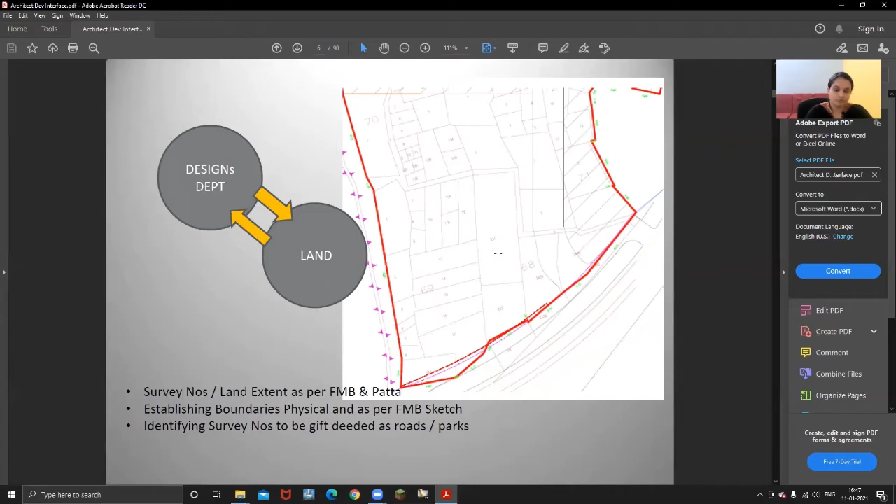In the concept and design stage, we get inputs from the sales and marketing team on what could be, whether they would be doing a marketing feasibility and sales feasibility, and they would give input like we prefer apartments or we prefer villas. Then what is the FSI achievable, for villas whether we need to go for twin or row, and what module they are expecting, so that has a saleable pricing which has to be determined.

And for apartments, whether we are going for low rise or mid rise, so which will give us the maximum FSI. Plotted development and preferred sizes of each plot, all that in the concept and design stage has to be worked out by a resident architect.

So the concept and design brief is circulated to the internal departments as well as to external architects as a design brief if we are finalizing the external architect. The resident architect is also instrumental in initiating and fixing external consultants like structural consultants and MEP consultants. We need to review the architect's agreement given by the external architects, to check whether the scope of services is fully holistic, and we need to conduct regular design sessions.

We need to consolidate the design brief, and we need to validate the design in terms of unit sizes and vastu, which is required by the sales and marketing department.

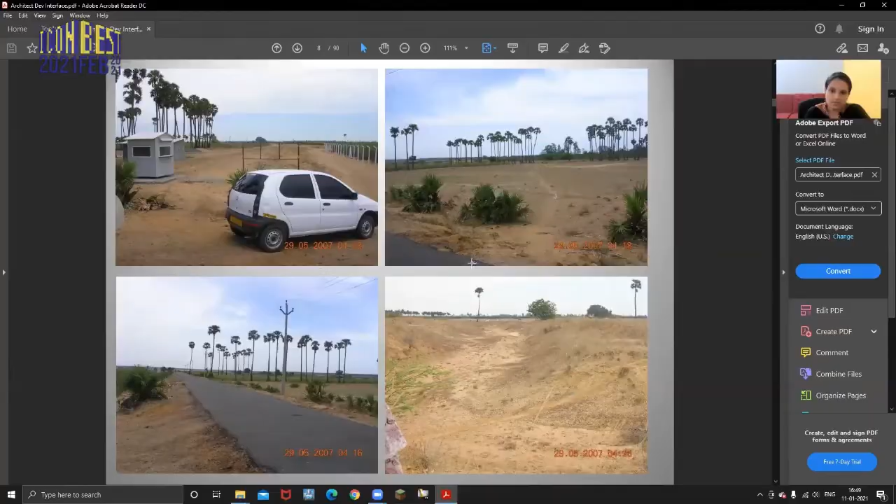This site, in 2007, was almost 400 acres of land bank, and we were in-house architects, a team of around 8 members, asked to work on different design typologies. We suggested an IT park, then residential, a spiritual center, a convention center. All these modules were worked out in various locations across the 400 acres, including multi-family housing and a medical college.

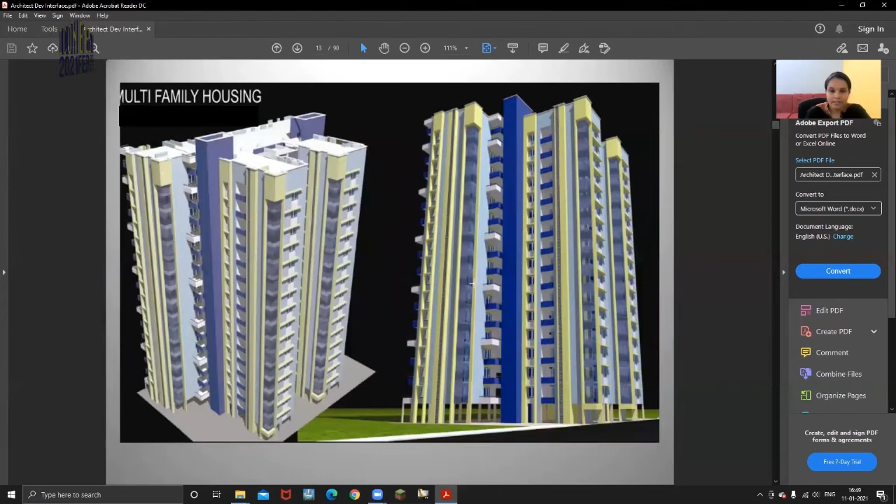So all these were worked out, and finally we ended up developing 110 acres over a span of 10 years. The main crux behind this 400-acre land bank was the finalization of the master plan, and after the master plan is zoned, allocating the land, with finance and marketing teams bringing people to develop their industries or colleges in this location.

However, being a private developer, dreaming of and bringing development into a place where there is none is a very challenging task for a developer company. It needs a lot of patience and hard work to bring in infrastructure, especially roads, street lighting, transformers, and leveling the land so there is no water logging.

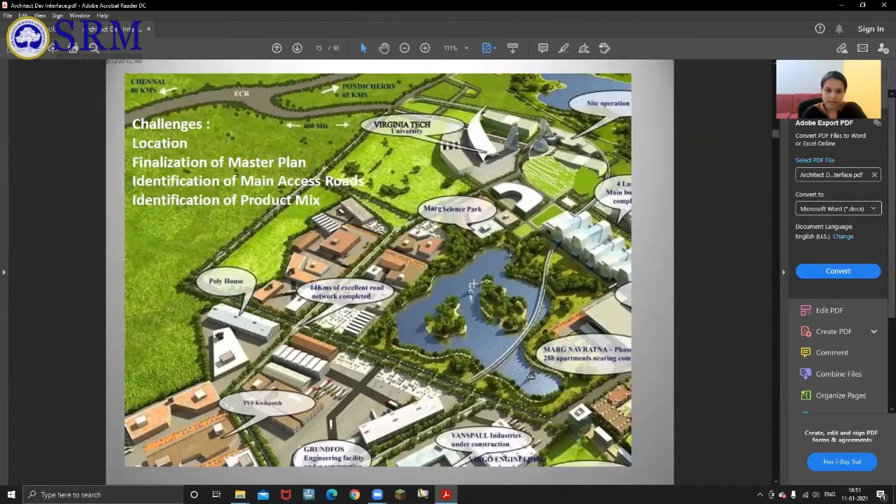So the main important point in a big land bank is finalization of the master plan. Previously the land bank was like this, and then it was developed into various zones as industries, college zones, and residential.

The next developer company I was associated with is ETA Star Property Developers, and they had floated a project of 22 acres at Tandalam near Poonamallee. It is a villa project.

The very moment we say villa project, 197 plots were purchased by ETA and Bashyam Group, and they floated villas in phase 1, which is 11 acres. So as resident architects, we did not have much design scope in terms of master plan, but we had design scope in terms of modules as plots.

We had one-ground plots, half-ground plots, and we were asked to work on it. And this being a budget project, it was not outsourced to external architects.

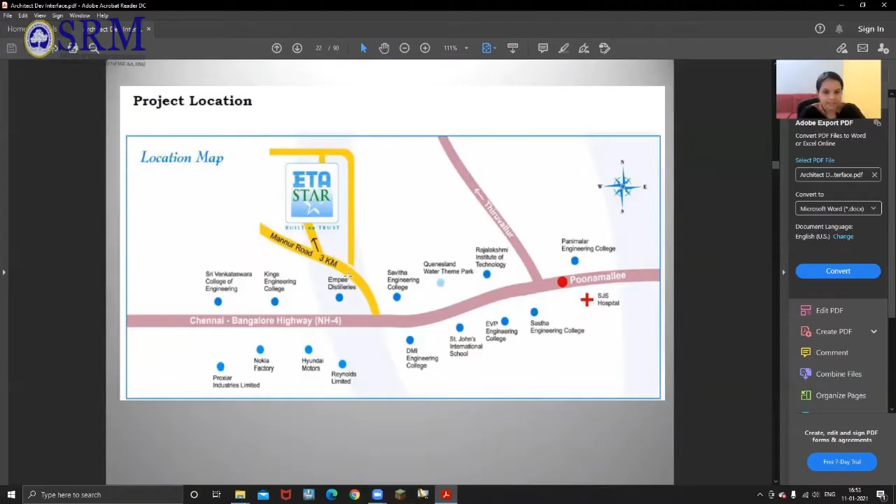You could see that the location is off the Chennai-Bangalore highway after Poonamallee, a little bit inset. So the location was slightly tough, and what the management ETA and Bashyam purchased was 22 acres of plotted layout. This was the access road off the highway, and for around a 1.3 kilometer stretch we had to get a PWD approval for laying the road to access the site.

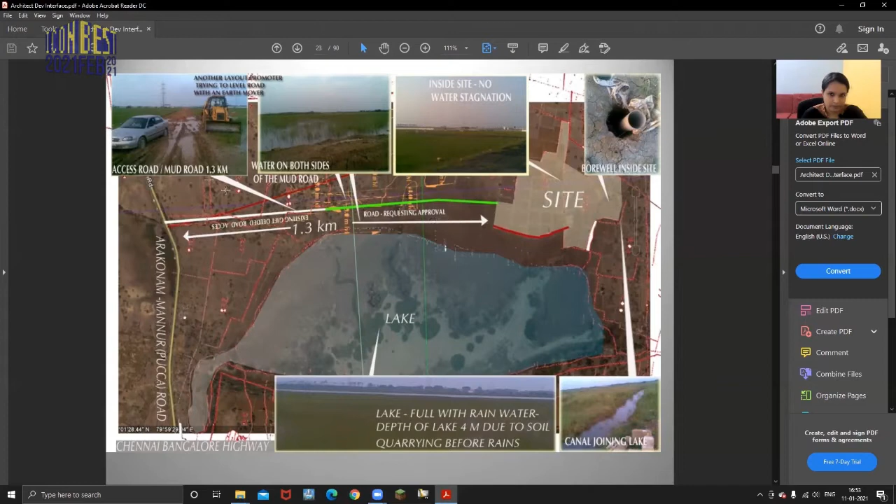And this was the site condition when the project land was initially identified for development. As far as ETA is concerned, they are a well-established company with their presence in the Middle East. Bashyam Group has also been in the industry for the past 30 to 35 years.

In this project initiative, we had many challenges. One is the location, and one is that it's already a plotted layout in which we had to develop villas. So accordingly, the project and product design had to be made.

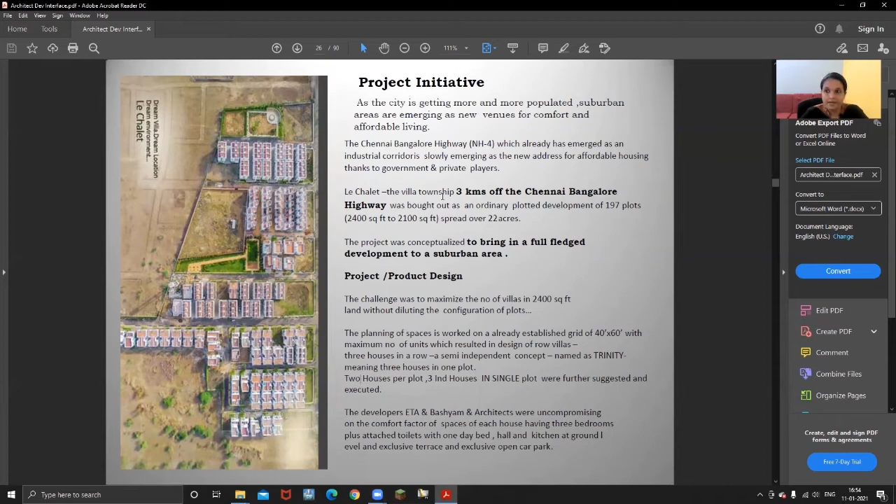The marketing and sales team had a budget where they wanted to price a villa at the cost of an apartment, meaning they wanted a 1,000 square foot, 3-bedroom villa. So that's how we slowly derived the product mix for this development.

In Phase 1, 1,90,000 square feet was developed, comprising 180 houses. This is a satellite image of the layout.

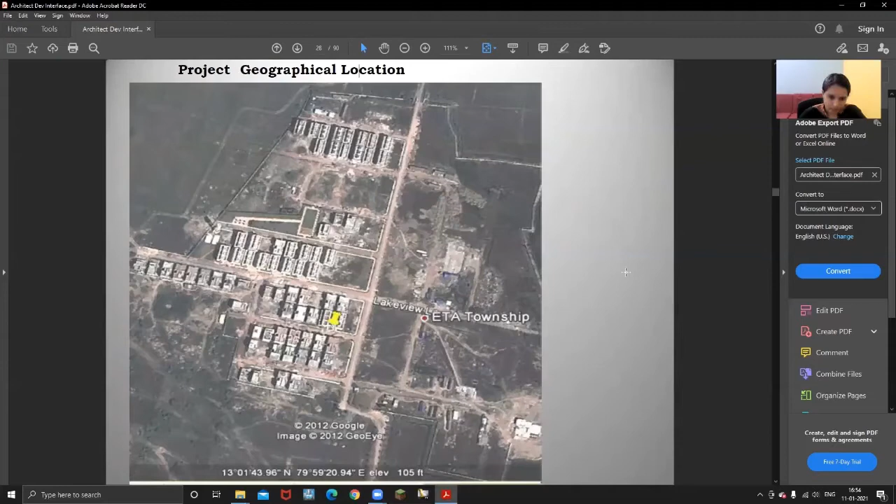The architects were from the ETA Designs Department, headed by Mr. Prakash and myself. The infrastructure consultants were Mahindra Consulting Services, the landscape consultants were Flora, and construction was taken up by a company called NA Divine Habitat Private Limited, with structural engineering by SBS Associates.

As in-house architects, we were involved in developing one ground plot. We had to have 2 houses as twin houses, then 3 houses as row houses, and we designed it so there would be a lot of openness in the project.

This is the design of one product mix, the row house, on a 40 by 60 plot. We had to fit three villas, leaving 11 feet of open space on one side, and similarly 11 feet of open space on the adjacent side of the opposite plot.

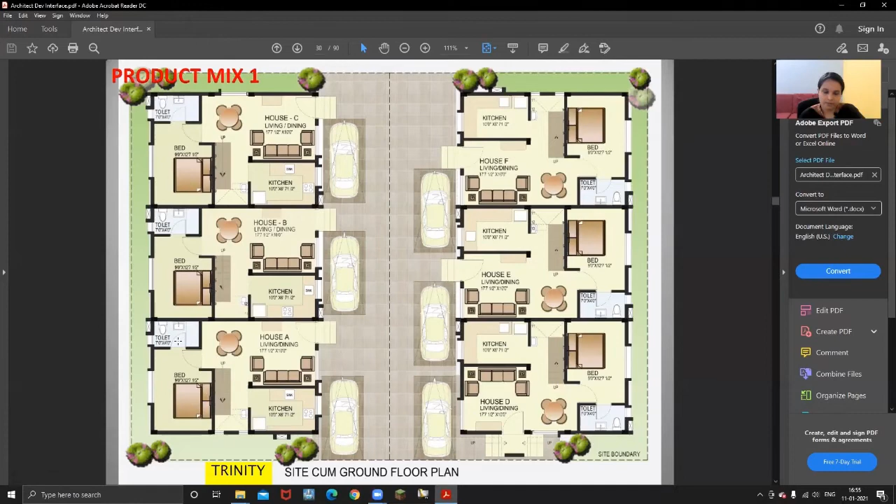We developed a 3-bedroom villa with the ground floor having a living room, dining area, bedroom, and kitchen with an attached toilet. The first floor had 2 bedrooms with 2 attached toilets, and access to the terrace.

This is the model house of a row house. We had already designed it and given the drawings and deliverables to the projects department to execute the model house.

During the finishing stages, we had to finalize every material like UPVC windows, grills, granite, and the furnishing for the entire 3 BHK. The resident architect had to interact with the purchase department in selecting materials.

This is the actual image of the site. As you can see, we left 11 and 11, totaling 22 feet, for open car parking, with 3 houses in a row.

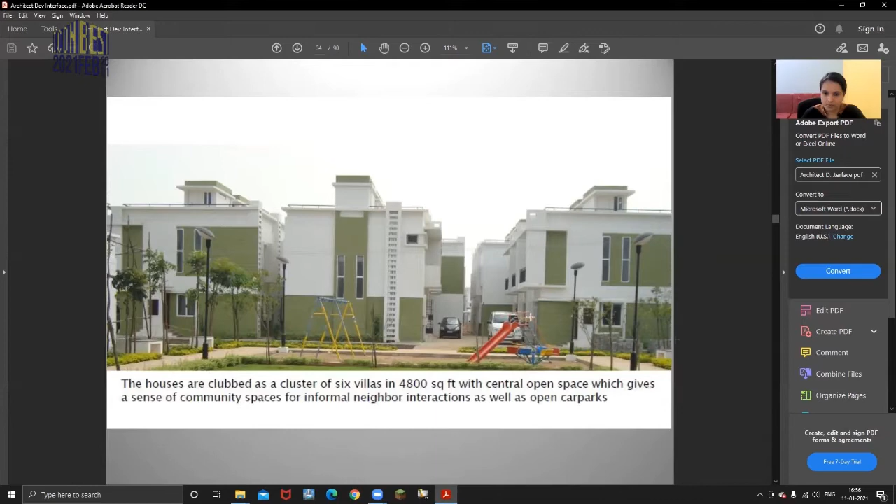For the facade design, since we were left with rectangular spaces, we had to break the monotony by introducing horizontal louvers as plastering, along with some silhouettes and projections to make the mass more interesting.

We chose green since it was a very peaceful and calm location. We thought of having a lot of greenery, so we also decided on the green palette for the exterior facade.

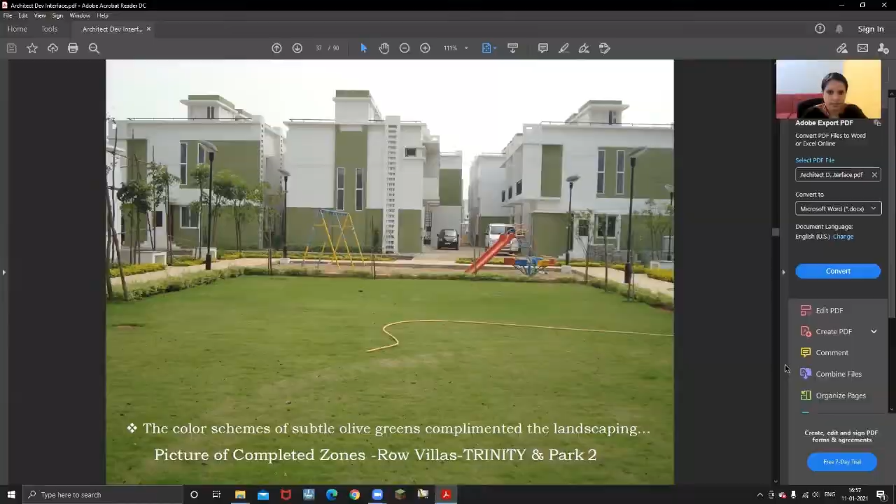Product mix 2 is the twin house, typically a 3-bedroom villa with a common wall between units. A 40 by 60 feet plot had a 20 foot frontage for each villa, with 20 by 60 feet being the planned area per villa.

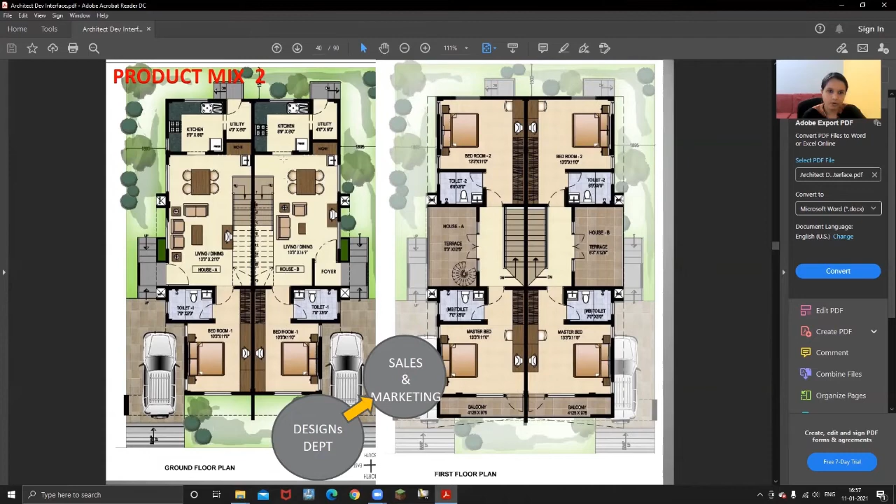It's again a duplex, with the ground floor having a single bedroom, hall, and kitchen, and the first floor having 2 bedrooms with 2 attached toilets. This is the next product mix, the twin houses, and this is the model villa.

We also developed another product mix, detached houses, since the marketing and sales team gave us feedback that because of the common wall, some buyers still prefer detachment from another house. So we derived another product mix called Elite Crux, worked out as 3 detached row houses in one ground.

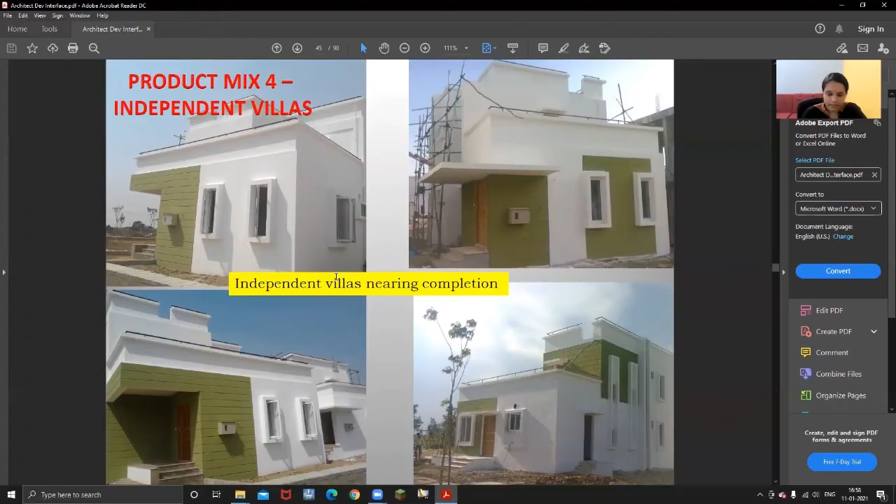This is the model house which was earlier done with blue paint. Then we moved on and changed the color.

A lot of deliverables had to be given from the design department to the projects department: working drawings, detailed drawings, interior detailed drawings, and samples for approvals. We also needed to coordinate with Mahindra consultants for the infrastructure work.

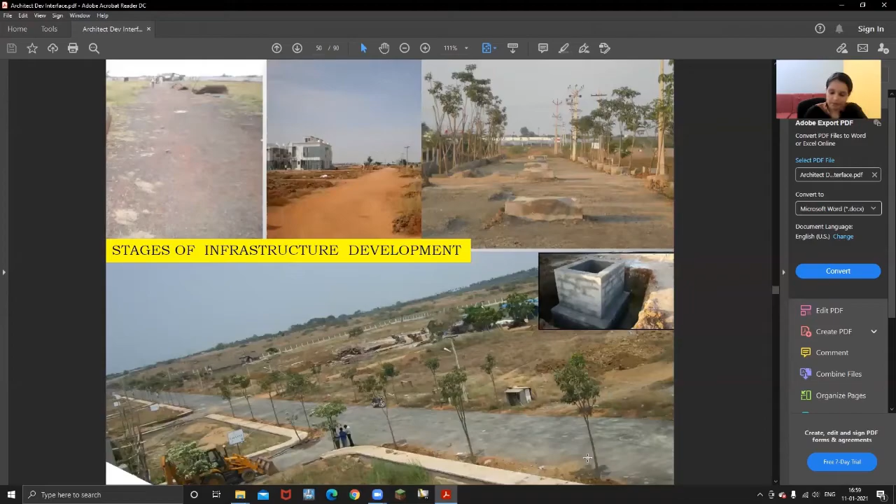As a policy decision, we categorically decided that we will not have individual compound walls for individual plots, so that the entire township has a lot of openness.

Water supply system was through deep bore wells in 4 locations, which are sent to the underground sump and then to the overhead tank, and then given to the villas with a water meter.

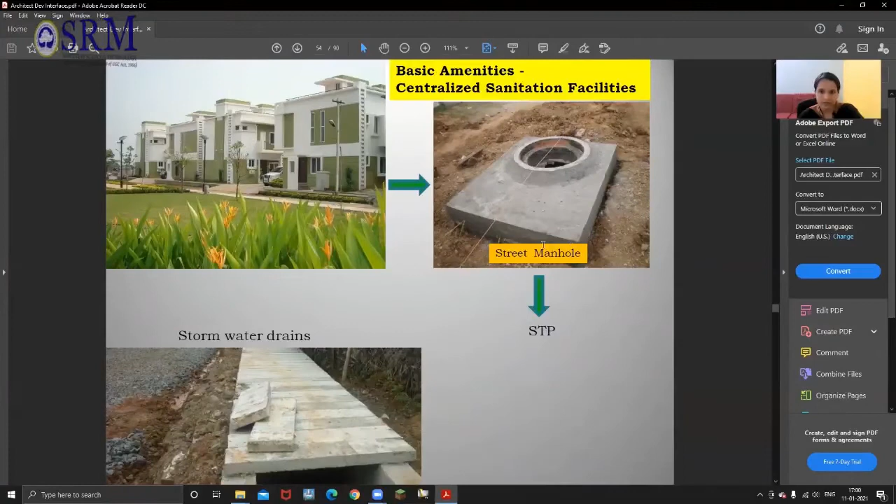The sanitation facilities, the underground drains, and the street manholes were developed before laying the roads.

There were a lot of tasks involved as a resident architect for 2 to 3 years, working on a hectic schedule for this project, done in a phased manner. The twin villas, the independent houses, as well as the row houses were done in a phased manner, and in phase 1 we were able to complete around 180 villas.

Parks were also designed and executed. There were some time-saving measures. For example, for the compound wall, instead of doing the entire stretch, we did a bit of fencing, a basic plinth beam, and little brickwork, so that the entire 23 acres has this kind of compound wall. We used solid blocks for construction instead of bricks, because the time for doing masonry wall with brick is more than solid block work.

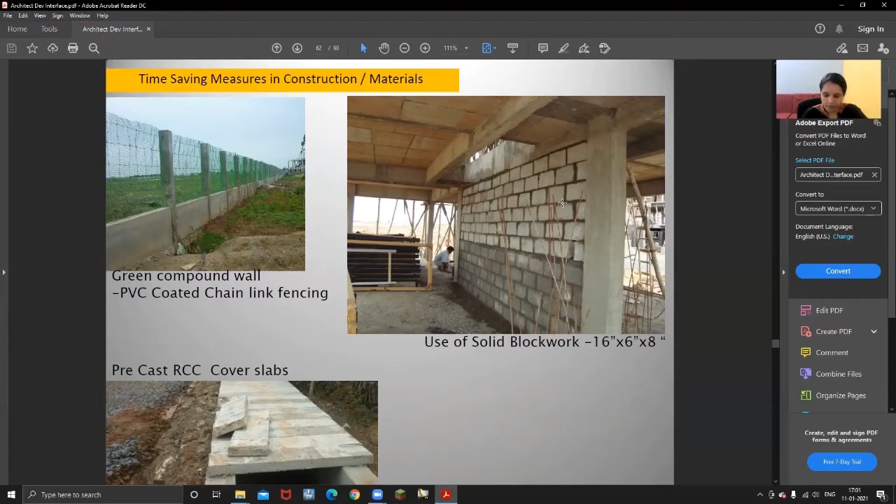We went for precast RCC cover slabs, which would again save time for the infrastructure work. So these were the villa project specifications, which was brainstormed in-house and then given during various project stages.

When it comes to marketing deliverables in other projects, some high-rise buildings and all that, we need to give brochure content. We need to coordinate and get the 3D views coordinated from agencies which outsource walkthroughs. We should also give area statement and the UDS statement, carpet area, then as per RERA. All these marketing deliverables have to be passed on to the marketing department.

So the resident architect plays a key role in every project of a developer company. This was a 7-acre development in OMR, which is a high-rise building. Our principal architects were Chitale and Son, and we were the internal resident coordinating architect within the developer company. So each sales team has a specific requirement.

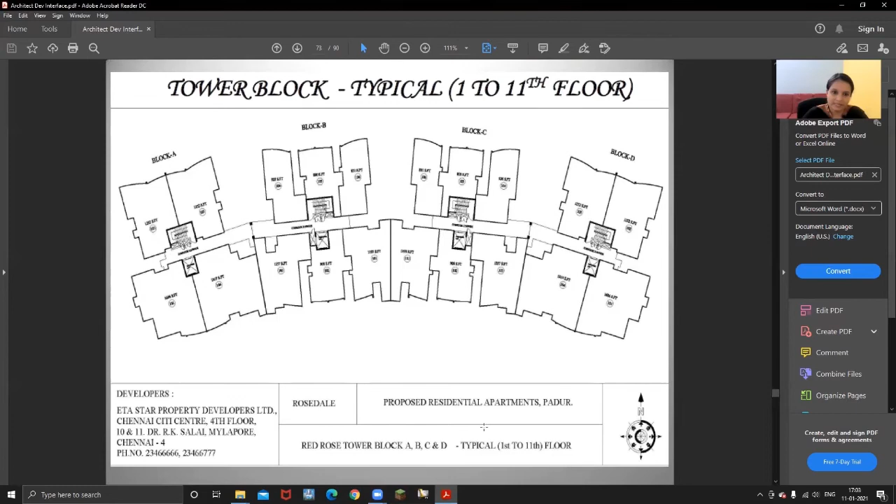For example, this is a sales team format which has to be given by the resident architect, required by the sales team for their understanding. All the split-ups, the area in square feet, UDS, all that first has to come from the designs department. Then it is worked out for the marketing team to arrive at the total cost of the apartment.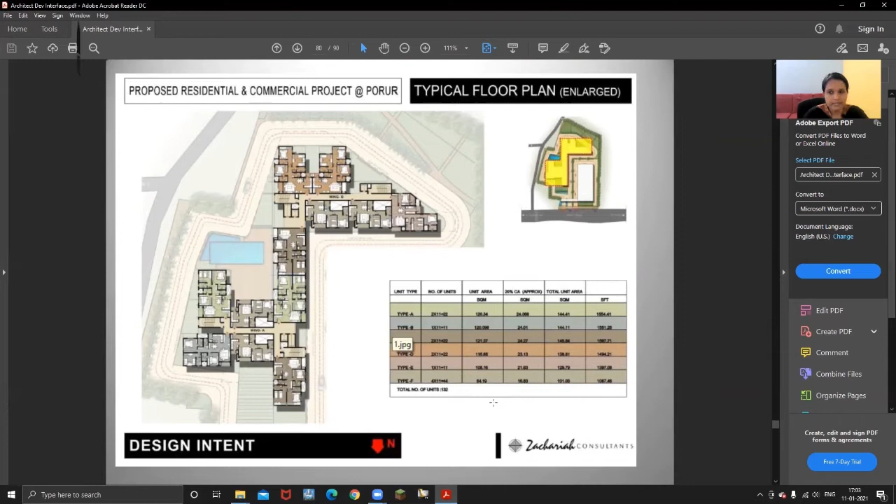This is another project, a high-rise building at Porur, called Verde, and the principal architects were Zachariah Consultants. Once they send the design in, the marketing and sales team says, no, we want Vastu, we want this, we want that.

So again, we had to take a butter sheet sketch on that and suggest them design, give them design suggestions saying this is what is required, and we want to detach the apartments a little bit so that there are less common walls or no common walls. So all this is done by a resident architect inside.

We should be able to understand what is the intention of an external architect and what is the intention of our in-house team on the project, and then give our inputs as a suggestion from the developer company to the external architect, so that the project is in line with the developer's vision and mission.

These in-house inputs have to come from the in-house designs department through the resident architect, so that the project moves on from concept to design and from design to approval and then approval to execution.

Again, in layout promotion, this is a 55-acre layout developed by ETA Star Property Developers at OMR. For this 55 acres of land, we had inputs on the modules of land so that it is easy.

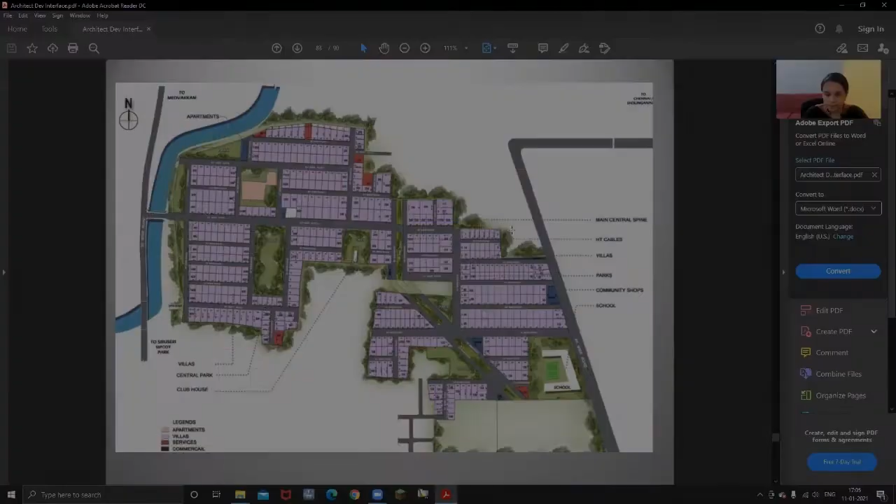The way the modules of land are, the easier the saleability. Again, the FMB from the land department has to be superimposed with the physical survey drawing, and each plot has to have their respective survey numbers, which is again passed on to the legal team for documentation and for registration with the buyers.

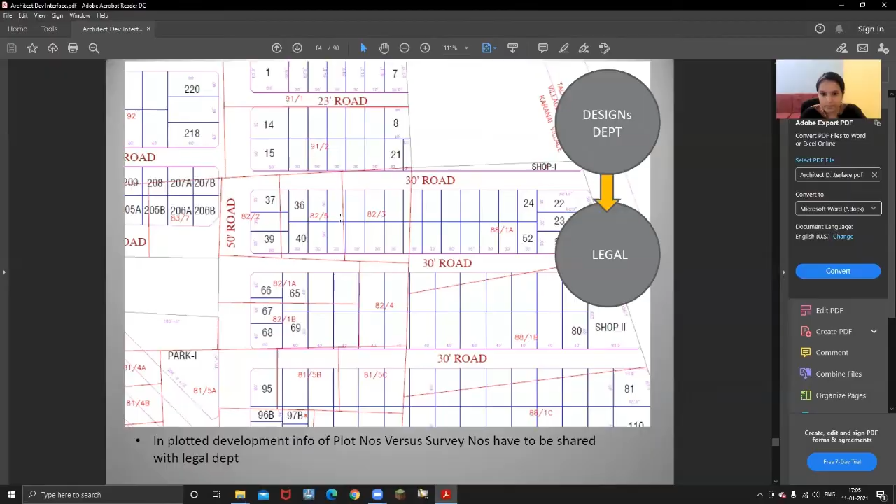Again, an in-house work where the resident architect should be able to understand the physical site boundaries and the superimposed FMB and derive the survey numbers. Layout considerations from a developer angle are site location, site terrain, project saleable area, and project infrastructure.

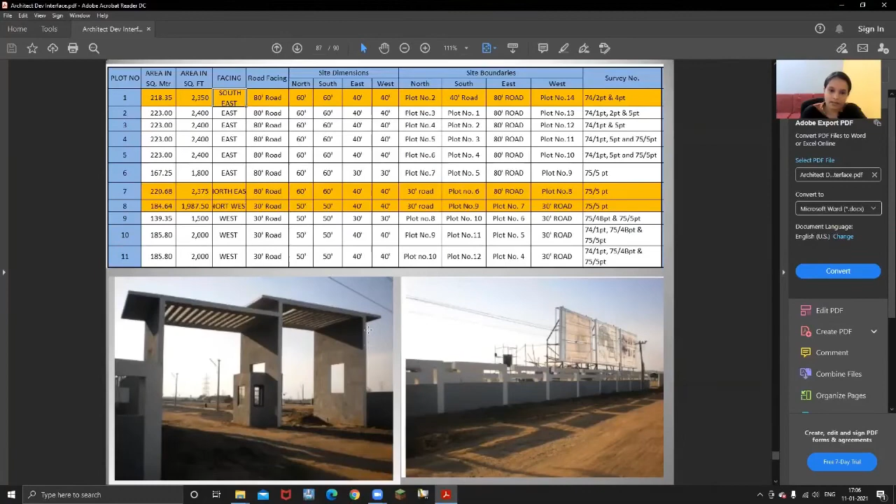Layout design inputs, as well as establishing boundary and the compound wall - the entire information has to be derived by the design department to pass on to the marketing and sales department in every manner. For example, area in square feet, square meters, facing, road facing, site dimension of individual plots, designing entrance gateway and compound wall. All that falls into the design department scope.

Then the infrastructure works for that layout is done by the developer. As architects, we have 5 business drivers: assets, growth, cash, profit, and people. Whenever people try to buy an asset or make an asset, it gives a lot of business to others like architects, licensing agencies, landscape architects, and for building the building we need people. All that is basically a business driver.

This entire real estate industry is a business driver, and we should be very proud that the real estate industry has almost 50 lakh people employed in this country, and we are only 90,000 architects in India coordinating with this real estate industry, giving inputs wherever we are.

I really feel good, happy and proud to be a resident architect in a developer firm. 5 years of my work, which I really treasure a lot, gave me a lot of confidence as an entrepreneur and helped me move ahead in my career. Thank you.

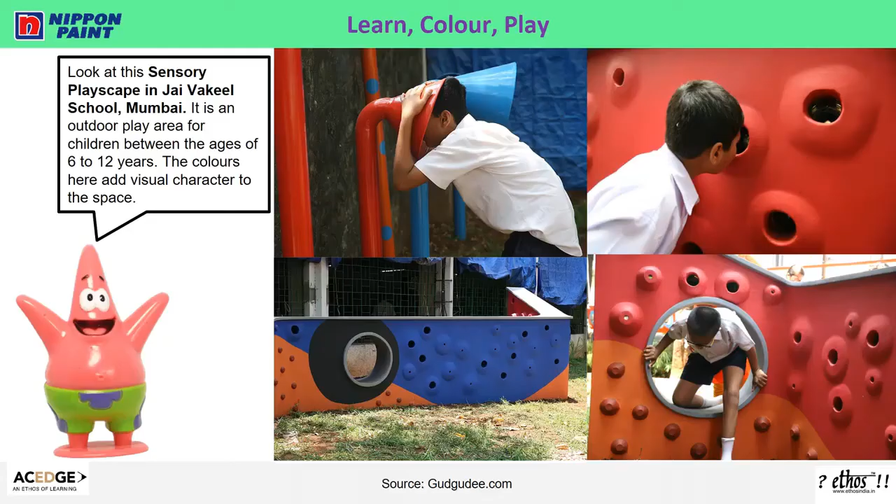And finally, dig deep into the human mind to get psychological perspectives of color. We will then go on to explore color in various spatial typologies of architecture and interiors. A transition from theory to practice would happen in the last module on practice and application of color. The journey would be immersive with fun quizzes and activities along the way. Join us in this colorful, fun-filled journey.